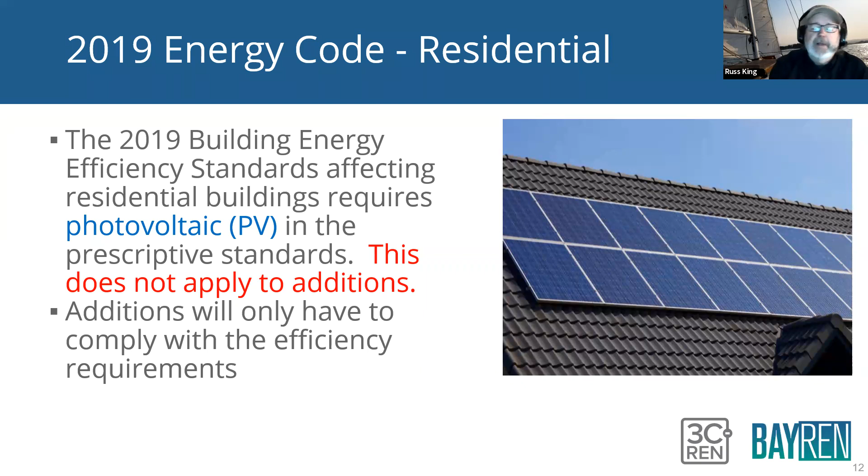When adding onto a house, there are several different ways to approach the heating and cooling, the HVAC system. So you have an existing house that has a heating and cooling system, then you're going to add on to your house and make it bigger. How are you going to heat and cool that new part of the house? There are 3 basic ways to do that.

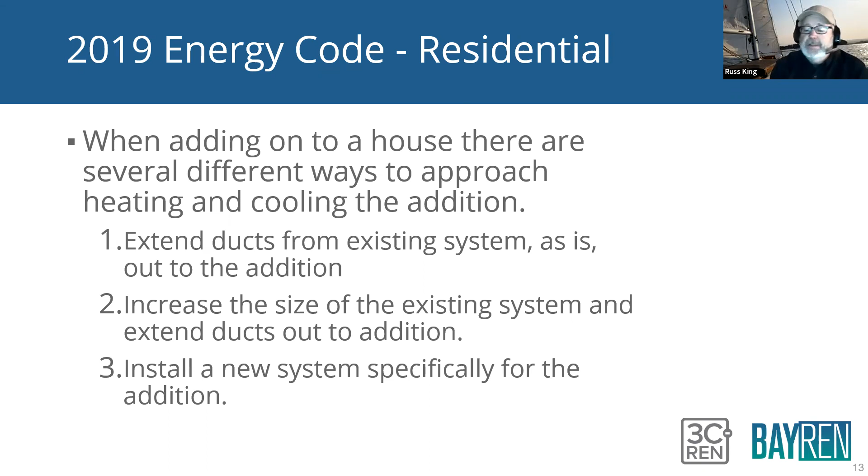The first one is to just extend the ducts from the existing system, and of course that depends on the capacity of the existing system and how much load is being added by the addition. We'll talk about increasing the size of the system and adding ducts out to the addition. And then, kind of the brute force method, is to just give the addition a whole new system itself. Again, it just depends on the size and scope of the addition.

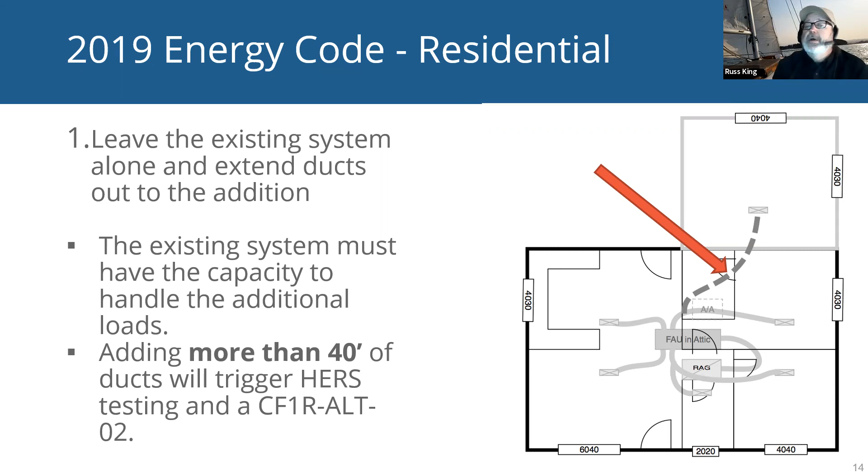So the first option: you have an existing house, you have an HVAC system serving that existing house, you build on the addition, and all you do is run a duct, or 2 or 3, out to the addition using the capacity of the existing system. The only time that would ever trigger anything like HERS testing or duct sealing is if you added more than 40 feet of duct to the duct system. That's one of the triggers for HERS testing. And if you do, you would have to fill out a CF1R Alt 02, just like you would for an HVAC changeout or something like that.

The other option is to increase the size of the existing system on the house, so you put in a bigger system, maybe a bigger furnace, bigger air conditioner, and then add a duct out to the addition. The fact that you've replaced the existing equipment will trigger HERS testing all by itself. So again, you have to fill out a CF1R Alt 02 in addition to the paperwork for making the addition comply.

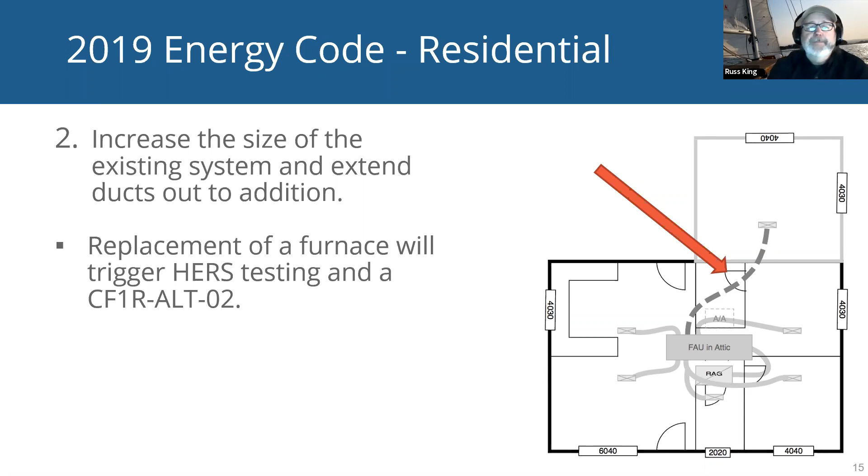That's a BayREN thing. Refrigerant charge verification is required in climate zones 2 and 8 through 15. So if any of your climate zones are in those, it would trigger the refrigerant charge verification. Climate zones 2 and 12 are the only two that would require it in the BayREN zone. Sorry about that, forgot to change that slide.

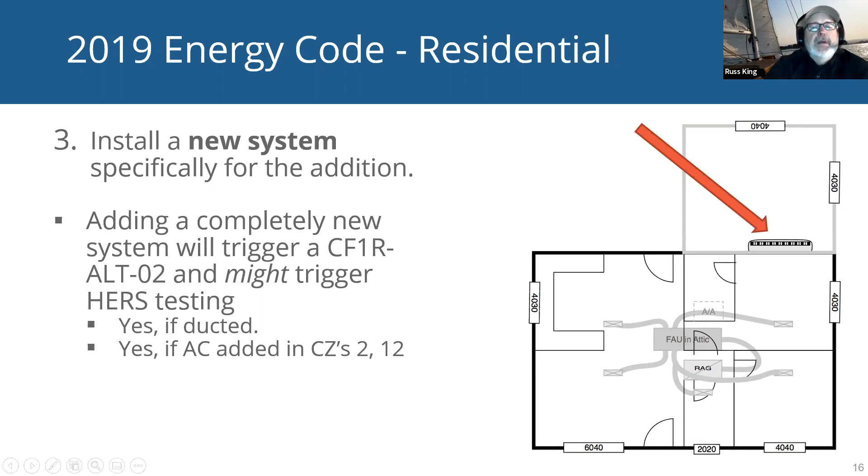For additions and alterations, the requirements for the prescriptive approach depend on whether or not the house has gas available. It gets into more specific definitions for things like water heaters. Basically, if gas is available to the house, the code historically favored gas appliances, so you had to prove you'd be more efficient adding electric appliances and replacing gas. But the 2019 code actually encourages replacing gas with electric appliances, so it's a lot easier to do than it used to be. All electric homes and additions can still comply even when there's gas to the house, thanks mostly to heat pump water heaters and space heaters because they're very efficient.

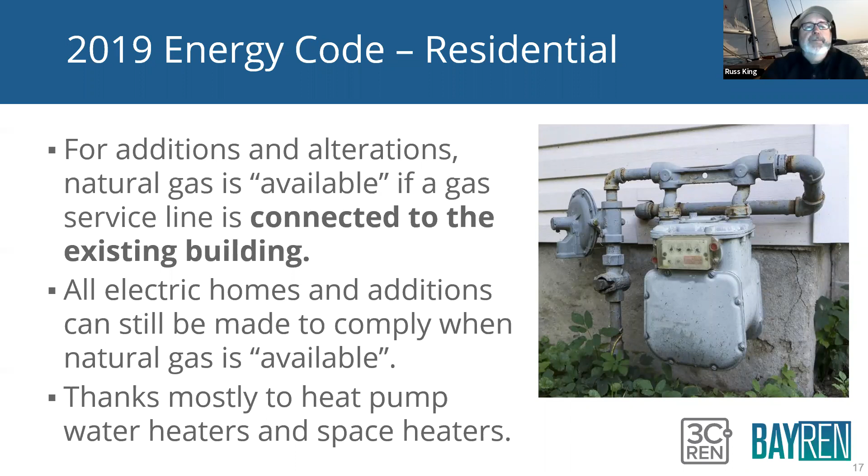Another requirement: if you install a completely new HVAC system for the addition, it triggers a bunch of mandatory measures. One is filtration—you have to have MERV 13 filtration in any new ducted space conditioning system. Also, if you have supply ventilation for indoor air quality mechanical ventilation, the type that blows air into the house, that air has to be filtered with a MERV 13 filter. This only applies to additions over 1,000 square feet.

A lot of little details going on here. You'll get a copy of these slides. You can also check the residential compliance manual, which has a really good section on additions that lists all this detail.

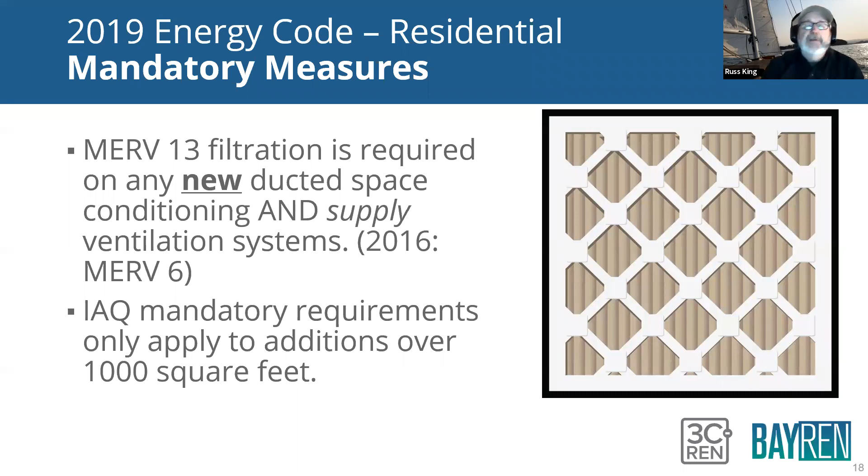Another mandatory measure that might get triggered depending on the scope of the project: all newly installed gas storage water heating systems must be readily upgradable to both tankless and heat pump. Section 150.0N talks about that. That's only if you're installing a new water heater as part of the addition—if you have an existing water heater and you're changing that, it doesn't trigger this. But if you're installing a new separate water heater for the addition, it has a whole bunch of mandatory measures, including pipe insulation.

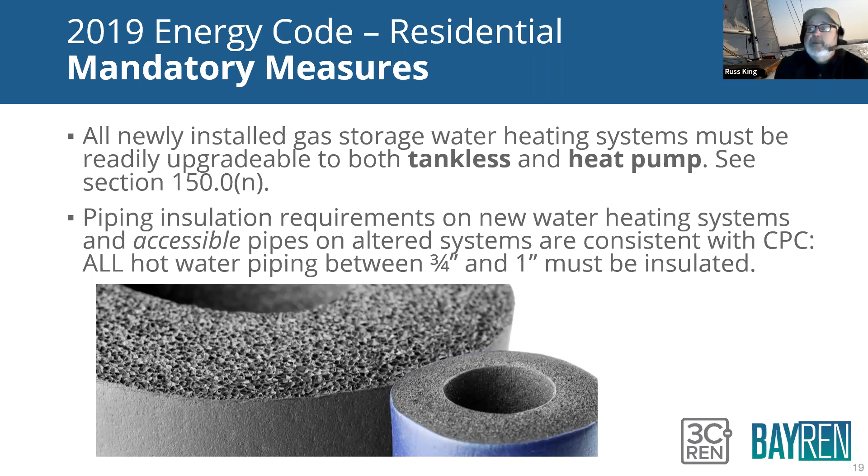Pipe insulation requirements on new water heating systems and accessible pipes on altered systems are consistent with the California Plumbing Code. All hot water piping between 3/4 inch and 1 inch must be insulated, even on an alteration. So if you have a gas water heater and you're upgrading to a heat pump water heater, that's considered an alteration, and the mandatory measures say all accessible pipes have to be insulated to these requirements.

QII, quality insulation installation, is a big one. It's a prescriptive measure on all new construction, and applies to additions over 700 square feet, but only to new opaque surfaces—new walls, new ceilings, new raised floors. If you're using the performance approach, most users can opt out of it and model it away, but in new homes that's really hard to do. In additions it just depends, it's not as hard. So you could technically model away the QII requirements on an addition over 700 square feet.

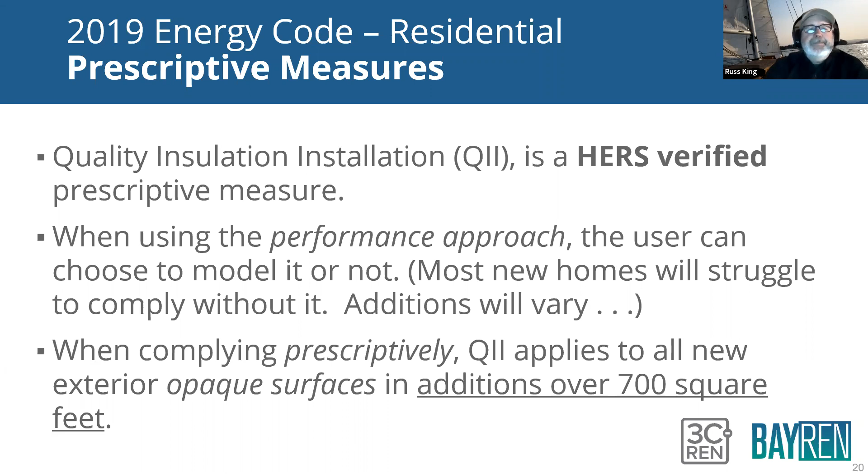Energy code documentation, documents, forms—that's what the energy code seems to be all about sometimes, filling out stuff. The energy code compliance process relies heavily on documentation, purely for enforcement. You document something so the enforcement agency can verify it was done correctly. Keeping track of all this documentation can be very challenging, but there are some very useful online tools that help you keep track of all the projects.

They're called HERS registries. We taught a class on the HERS registry, how to use it. There are 2 California HERS providers that the CEC has approved: CalCERTs, who I work for, and CHEERS. They tried to change their name to California Energy Registry, but the Energy Commission denied that request, so it's CHEERS.

So the CHEERS registry and the CalCERTs registry do essentially the same thing. They are supposed to keep track of all the documentation on any project that has at least one HERS test. I gave you some examples of things that trigger HERS testing: extending the ducts more than 40 feet, certain climate zones. If you add a refrigerant-containing component, you have to do refrigerant charge verification, duct testing, indoor air quality testing. Those all trigger HERS verification. If one HERS test is required on a project, all the forms for that project have to be in one of the two registries, either CHEERS or CalCERTs, okay?

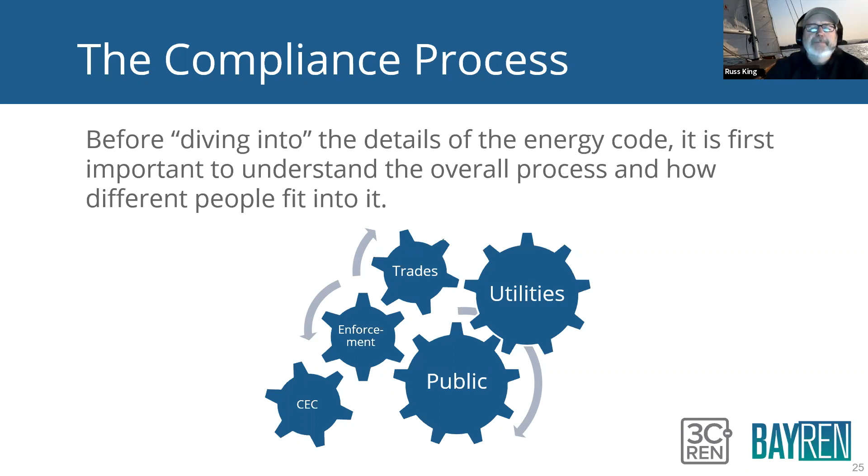All right, so let's kind of step back a second and look at the overall energy code compliance process, get a big picture view of the process. Before diving into the details of a specific part of the code, it's important to understand the overall process and where we are in that process, okay? So all projects have three basic types: there's mandatory measures that cover everything, and then there's two choices that you have on how to make a project comply.

There's the simple approach and there's the complex approach. The simple approach is simple, but it's more restrictive. The complex approach is very complicated. You have to hire a consultant, but it's very, very flexible in terms of what you can build.

Another name for those two approaches are the prescriptive path and the performance path. The prescriptive is based on just a list of features. Install what's on this list and your building or project will comply. On the performance path, you have to model the building—create a computer simulation model of the building, of the project, and show that it meets the requirements. But the nice thing is you can trade things off.

You can say, the prescriptive requirement only allows me to put a certain amount of windows in my house. The performance path will let you put as many windows as you want, but you're gonna have to do something else to the house to make it efficient to offset that.

So there's trade-offs there. This applies to new construction, additions, and even alterations if you wanted to. The prescriptive path will be used for most smaller, simpler additions. The performance path will be used for most larger, more complicated additions. There's no hard and fast rule as to which is which—it just depends on how hard it is to make it comply to the energy code.

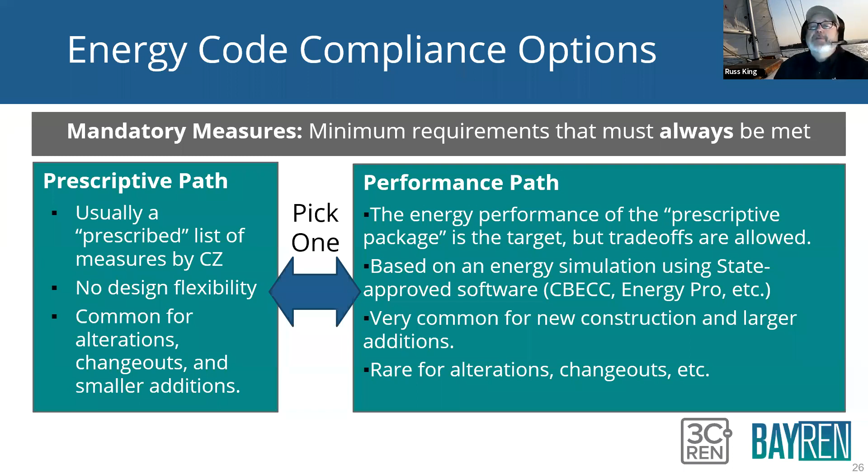The prescriptive approach is based on these tables, called table 150.1-A, and that's basically a list by climate zone. You'll notice on this table there's 16 columns—there's 16 climate zones in California. So you have to find your climate zone and go down that column, and that tells you what you're supposed to do to that house.

But if you use the performance approach, you're being compared to this list. You have to have the same energy use as if you built it to this list, but you can put in whatever features you want. That's what the computer simulation does—it compares your proposed house to the standard house that has these features in it.

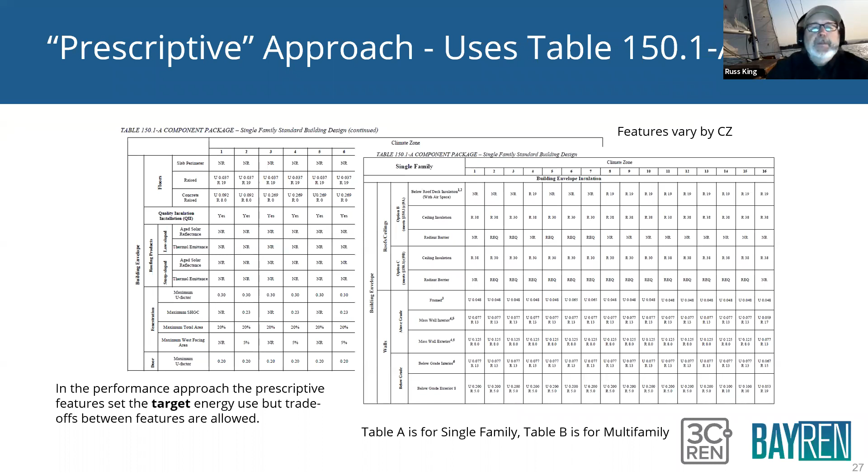I got ahead of myself a little bit. The performance approach uses the computer simulation—it takes your house the way you want to build it, models that, figures out how much energy it's going to use, and then it takes your house, applies the prescriptive measures to it, and models it. That energy use is your target.

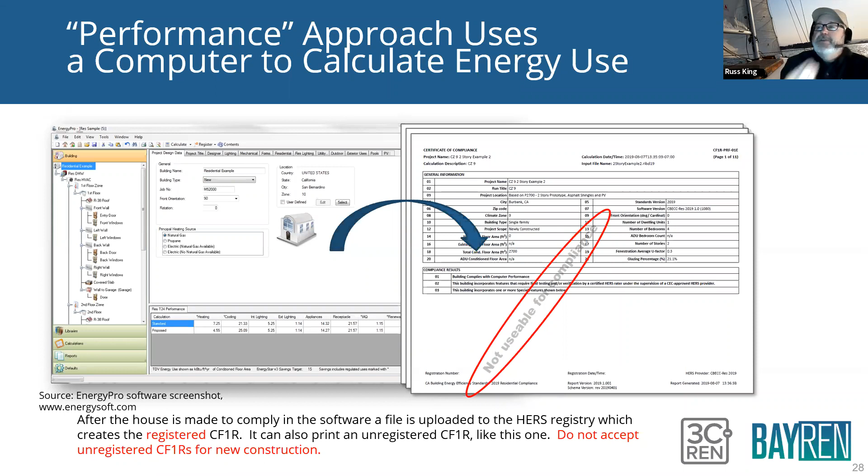So you've got your standard house, which has the prescriptive measures—that's your target. Then you have your proposed house, which is the way you want to build it—that's your actual energy use. Your actual energy use has to be better than or equal to the target.

Mandatory measures must always be met—those are not things you trade off. They're found in section 150.0, listed on most of the CF2R forms, and include things like the lowest efficiency air conditioner you can install in California, lowest efficiency furnace, and the least amount of wall insulation you can possibly have. These are bottom level minimums you can't go below.

But then there are also things like lighting in a house. You have to have certain kinds of lighting and certain kind of controls—you just always have to do that. You can't put in more insulation and trade off your lighting requirements, because lighting requirements are mandatory measures.

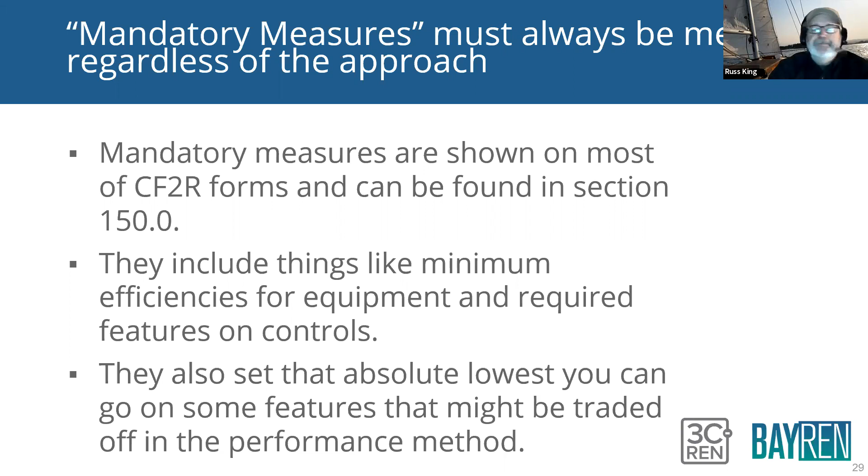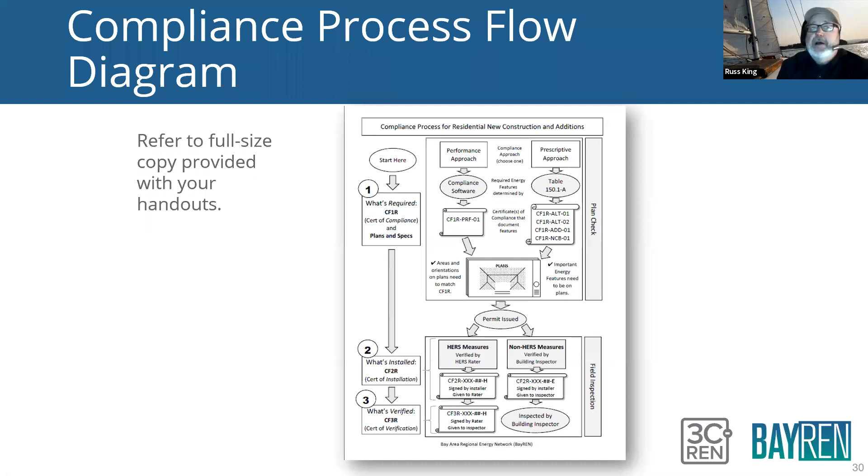So the first step is to figure out what's required. Once you figure out what's required, it goes on to a document called the CF1R. The CF1R certificate of compliance is a list of what's required for that house.

The CF1R depends on the project. It could be a CF1R PERF 01, which is the performance approach. But think of the CF1R as a list of what you're supposed to do.

Step 1 is figuring out what you're supposed to do, put it on the CF1R, and off you go. Step 2 is to install those things, then document what you installed — that's part of the CF2R. The third step is to verify what you installed, have somebody check it. So the 3 steps are: figure out what you're supposed to do, install it, and have somebody check it. If you think of the energy code in those 3 steps, it simplifies things and makes them a lot easier to understand.

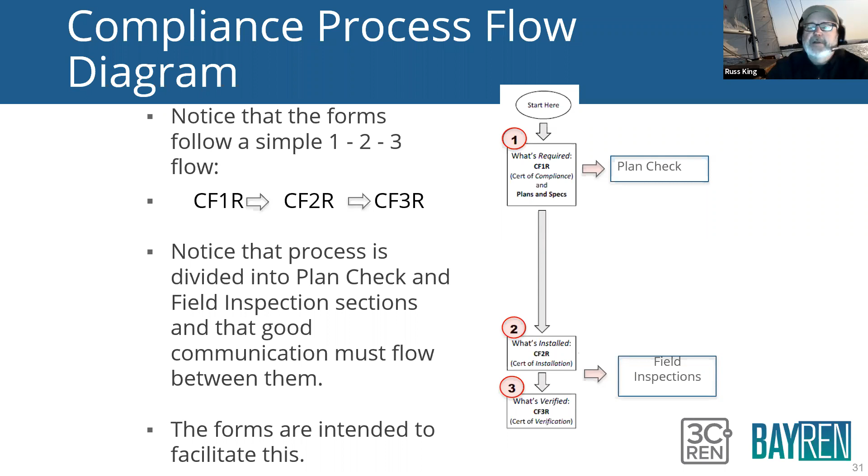Going back to the document, looking at the top part, we have step 1, the CF1R, and here are our 2 compliance approach paths. The performance approach is where you use the software. The prescriptive approach is where you use the tables. And additions can be in either one of these.

New construction, 99.99% of the time, is going to use the performance path. Alterations, like an HVAC change out or water heater replacement, 99.9% of the time are going to use the prescriptive path. But additions just kind of depend — smaller additions will probably lean towards the prescriptive approach, larger additions will definitely lean towards the performance approach, but you could have either one.

So the bottom line is you're going to have a CF1R that tells you what you're supposed to do. If you're using the performance approach, that CF1R is called a CF1R PERF, which means performance approach. If you're using the prescriptive approach, there are several different kinds of CF1Rs you might use.

There's a CF1R ALT for alterations, CF1R ALT 2 for HVAC alterations — we talked a little bit about that. CF1R ADD for additions, and then the CF1R NCB for newly constructed buildings, but that's also for additions over 1,000 square feet, which you don't see too often for the prescriptive approach. If it's an addition over 1,000 square feet, I almost guarantee they're going to use the performance approach for that.

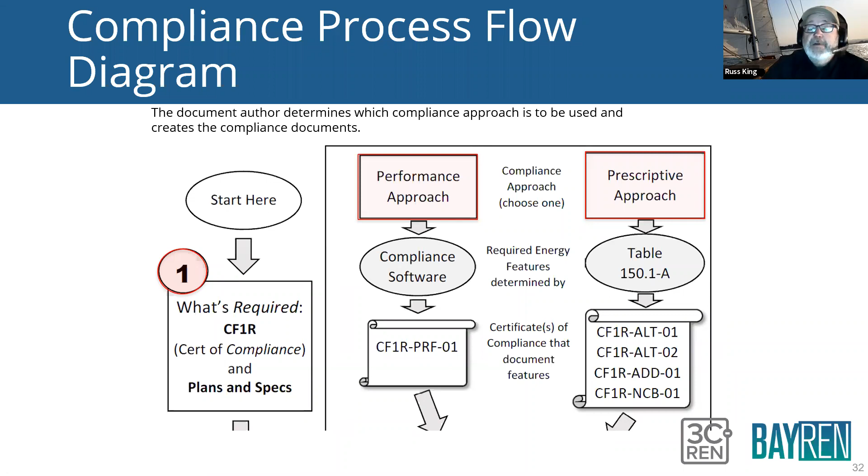Now going down a section on that diagram, we have a set of plans here, representing the plans being submitted for that project. It should have all the areas and orientations on the plans, and those need to match the CF1R. The important energy features should also be on the plans — don't leave the energy features inside the CF1R.

CF1Rs can be a little challenging to read, and they don't always get well circulated amongst all the trades. It's a good idea to take the important energy features — like the wall insulation, the kind of windows, the R-value of the walls, all that stuff — and put them on the plans. That's where the trades are going to look for that stuff.

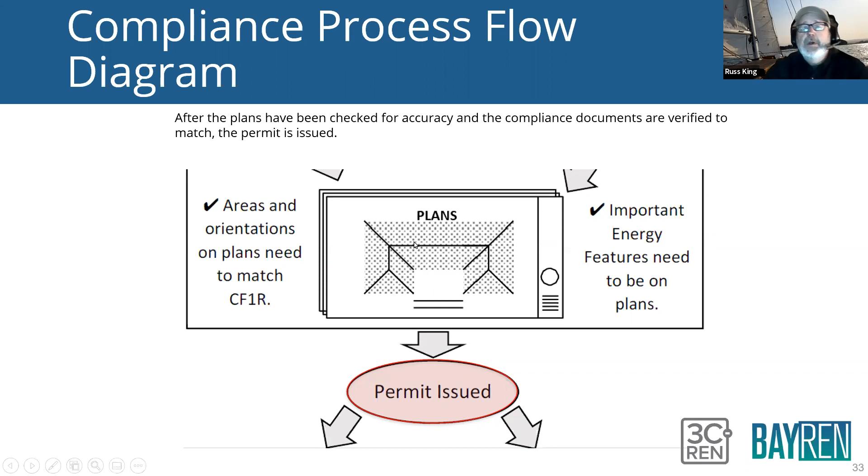Once it goes through plan check, the permit gets issued. Then once we start building the house or the project, let's take all the energy features — there could be dozens and dozens of them — and split them into two basic categories, determined by who is supposed to verify them.

We'll call them HERS measures and non-HERS measures. HERS measures are inspected by a third-party special inspector called a HERS rater. Non-HERS measures are verified by the building department. HERS measures typically require special equipment like a duct tester, a blower door, or refrigerant gauges. Non-HERS measures are typically things you can just read a label for, like windows, R-values, and water heater efficiencies.

The bottom line is, it doesn't matter which kind of measure it is or who's verifying it — they all need a CF2R, the certificate of installation. Think of the CF2R as a signed affidavit by the installer saying they put in the right stuff. That's required regardless of whether it's a HERS or non-HERS measure, so all measures get a CF2R. Then the HERS measures get one more form, called the CF3R.

That's the HERS verification certificate of verification. The CF2Rs that are non-HERS measures don't get that. They're just inspected by the building inspector, and there's no additional documentation.

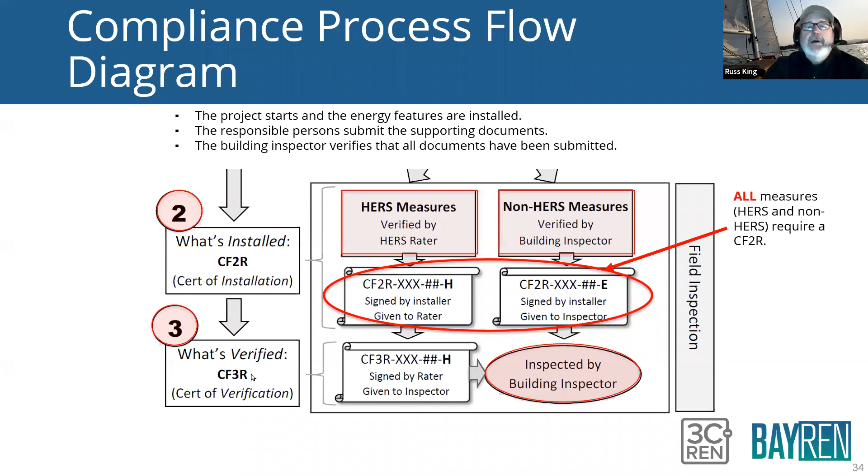All right, so there it is in a nutshell. If you have any questions on that, feel free to ask.

Let's dive into a little bit more detail about additions. Before we do that, I'm going to give you the secret decoder ring method of figuring out what the heck a form is. You get all these forms from the Energy Commission or for the Energy Code, and they hand you this form, let's say it's a CF2R EXC04, and you're like, what the heck is a CF2R EXC04? So you come in here, and this is the nomenclature for the forms.

They all follow this basic format. There's going to be CF, which means compliance form. Then there's going to be a number, CF 1, 2, or 3. The 1 is a certificate of compliance, the 2 is a certificate of installation, and the 3 is a certificate of verification. That's our 3 steps.

Figure out what's required, what's installed, what's verified. Then there'll be an R for residential, and then there's going to be 3 letters, and those 3 letters will correspond to this list here. For CF1Rs, the 3 letters sort of describe the compliance approach and a little bit about the project: is it prescriptive addition, a prescriptive alteration, or a performance approach? So that's what those 3 letters will be.

On the 2Rs and 3Rs, those 3 letters describe a part of the building, a building component. So they're going to say things like ENV for envelope, EXC for existing condition, MCH for mechanical, LTG for lighting, and so on. It's like a code for the building component.

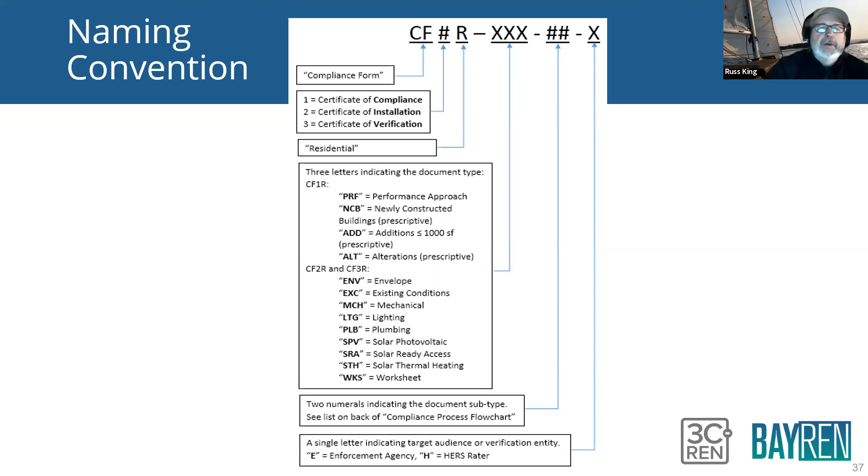The good news now, since the 2013 code, is that they are all electronic. You can actually do the entire energy code compliance process without printing out a single piece of paper if you wanted to. A lot of people rely on paper—that's fine, if it helps your inspection process or whatever, that's fine, but you don't have to. You can do it without printing out any paper for all the forms.

All right, for prescriptive projects that don't require any HERS measures - so that would be like replacing a water heater or replacing windows. It's possible you could have a really small addition that did not trigger any HERS verification. If that's the case, they don't have to be registered with the HERS provider.

Good news and bad news. The good news is they don't have to register with the HERS provider. The bad news is it's harder to track because they're independent forms, and there's no central location where you can go find them.

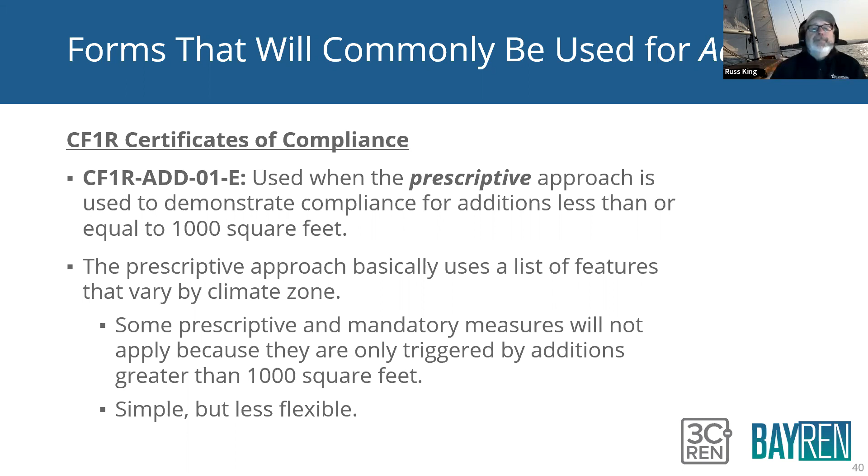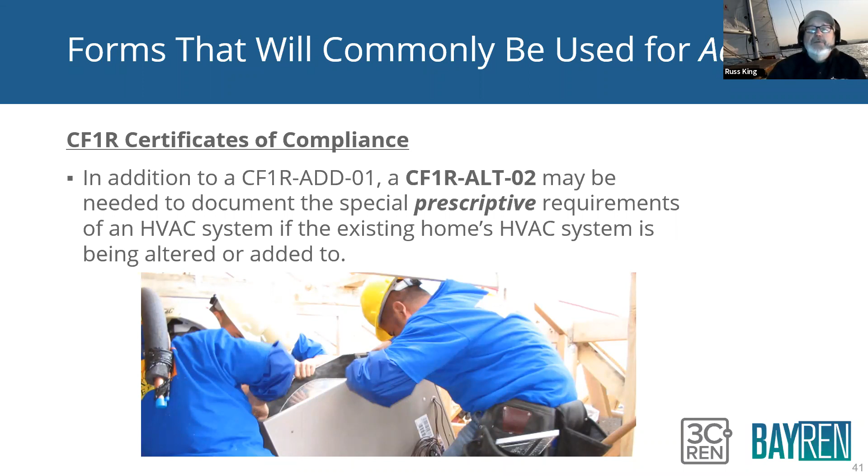If you're altering the HVAC system as part of the addition - and I showed you those three options at the beginning - those probably will trigger the CF1R Alt 2. So as part of the addition, you're altering the existing HVAC system, which will trigger things like duct sealing, refrigerant charge. If it's a completely new system, you might have airflow and fan watt draw - all these HERS measures. So that will be the CF1R Alt 2 to cover those HVAC alterations.

The CF1R NCB - that's the one I was talking about. If the addition is over 1,000 square feet, it triggers some extra requirements such as indoor air quality. So the CF1R for prescriptive additions over 1,000 square feet is the CF1R NCB. NCB actually stands for newly constructed building, but additions over 1,000 square feet use that form as well.

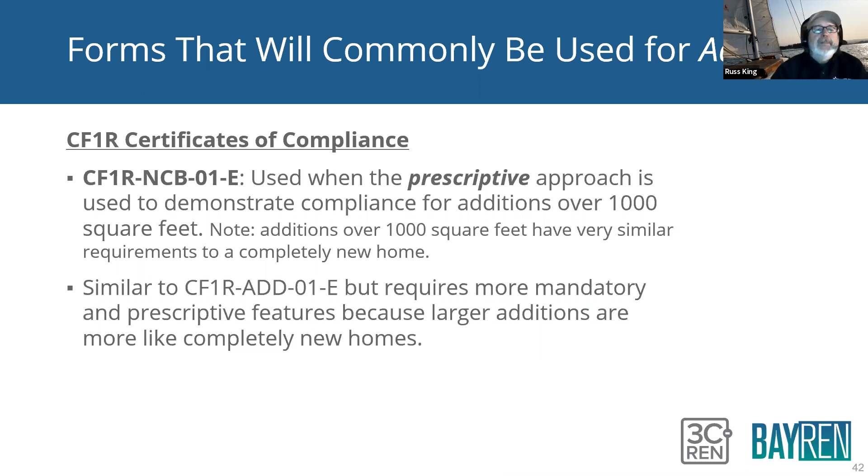Then, probably I would say, if I had to guess, I'd say 75% of additions use the performance approach, at least from what I've seen. It depends again on the size and complexity and all that stuff, but a lot of additions really do use the performance approach.

And when they use the performance approach, the CF1R will look very similar to what it would look like for a new house. It's called a CF1R Perf 01-E. And for additions, you have a choice of how you want to model that house or addition.

One of the more common ways is what we call E+A+A. That is where the CF1R is going to show the floor area and the walls for the entire house - the existing house and the addition together. E+A+A stands for existing plus addition plus alteration. The interesting thing about that is you might be adding on this big addition to the house that has a lot of glass in it, and it would be very hard to make that addition comply by itself.

So what E+A+A does is you're sort of buying energy compliance by improving the existing house. You can actually make your addition comply by adding insulation to the existing house, by replacing the windows in the existing house. So it's an interesting concept, and we call that E+A+A.

Right on the CF1R at the very beginning, it'll tell you, I want to say it's like row 5 or 6, the very first page of the CF1R, whether it's an alteration by itself, whether it's an existing plus alteration, or sometimes you can even model additions as a brand new house. You can say, I'm going to meet the requirements as though this addition was a brand new house.

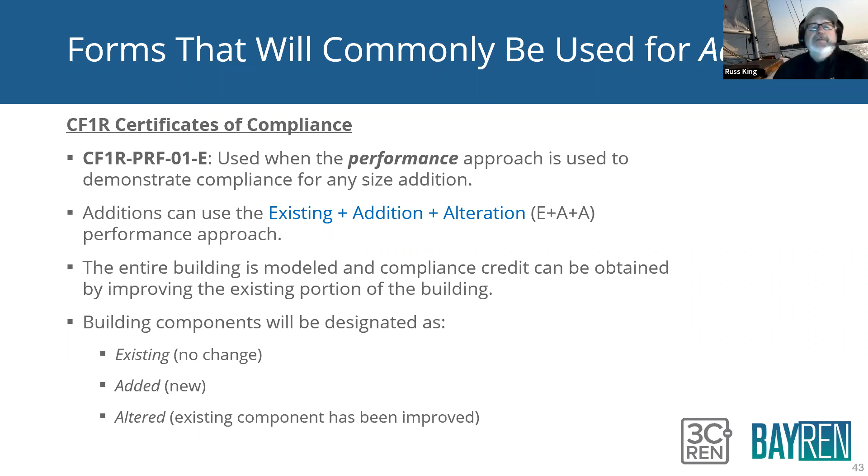CF2Rs, again, think of it as an affidavit for the installing contractor saying that they installed the right stuff, okay? So it applies to basically any features that are installed or required as part of that addition. And again, that depends on the size and the complexity of the addition. But you're almost always going to have windows, right? And in an addition, you're almost always going to have windows.

So there'll be a CF2R ENV01, that's going to document that they put in the correct windows. You're going to have to seal any new walls and stuff like that, so that's going to be the ENV02, which is going to have air sealing. You're probably going to have some new walls or ceiling with insulation in it, so that's the CF2R ENV03.

Again, all these forms are tracked for you by the HERS registry. The CF1R is uploaded to the HERS registry, and the HERS registry takes that CF1R and figures out all the forms that are going to be needed for that project and creates that list. That's the project status report, a list of all those forms.

So the LTG is lighting. All projects pretty much need lighting, right? Any kind of addition is going to have some sort of light fixtures in it, and you have to document that they met the mandatory measures. So that's the LTG01. And then, of course, mechanical. If you're altering the mechanical system or adding a new mechanical system, the MEC01 is where it's going to talk about what's going on there.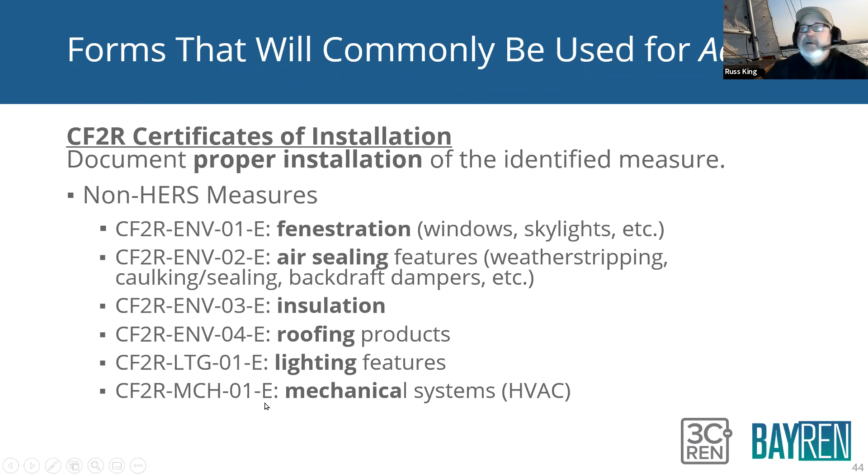By the way, that list there, those are all non-HERS measures. Those are all measures that are documented by the building inspector. The next list are HERS measures. Let me go back again one time real quick. Notice all these CF2Rs here - notice they all end in an E. That's how you know those are non-HERS measures.

This next list, these all end in an H, and the H stands for HERS verified. That means they also need a CF3R. These CF2Rs are going to have a CF3R that sort of goes with them.

So those are things like the MCH-20, for sealed ducts. If you're adding or replacing equipment that's a ducted system, or if you're adding or replacing more than 40 feet of ducts, that triggers duct sealing. That has to be tested by a HERS rater. If you're installing a completely new ducted system, you have to test the fan watt draw, you have to test the airflow, and if it has air conditioning, depending on the climate zone, you might have to test refrigerant charge.

The MCH 27 documents indoor air quality mechanical ventilation. That's only triggered for additions over 1,000 square feet.

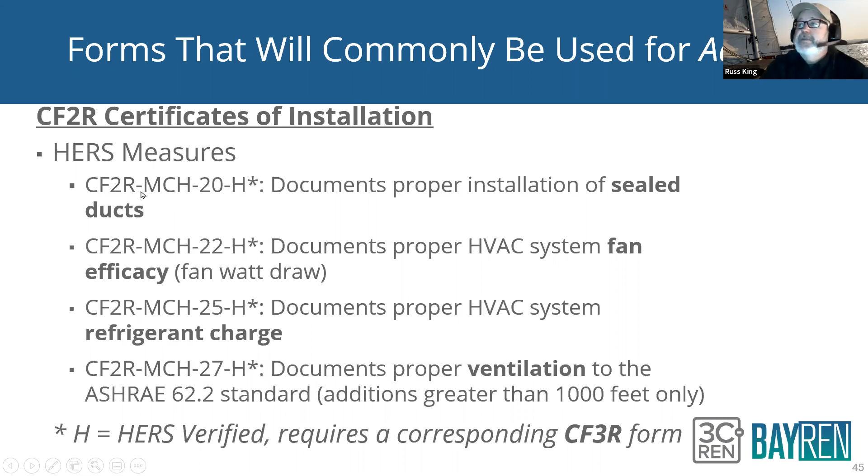Then the CF3Rs. So let me go back. You've got the MCH 20, MCH 22, MCH 25, and MCH 27. Those are all CF2Rs, filled out by the installing contractor, but they end in an H, so those are HERS verified measures. The next list is the CF3Rs that go with those: CF3R MCH 20, CF3R MCH 22, MCH 23, MCH 25, MCH 27. Same numbers, the only difference is they have a 3, CF3R instead of CF2R.

These are filled out by the HERS rater. This is where the HERS rater goes out, tests the ducts, and says yes, they pass. They test the airflow of the HVAC system and confirm the ducts are sized correctly. The CF2R is for the installer to say, yes, I did it correctly. The CF3R is for the rater to say, yes, I checked it and they did it correctly.

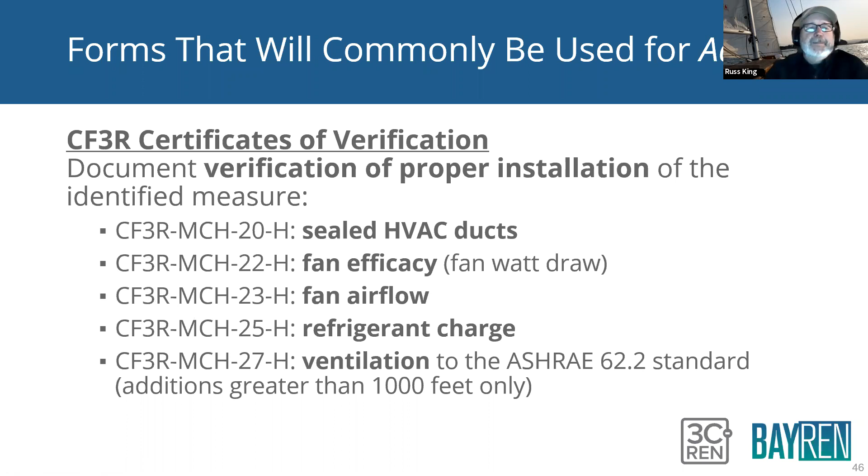All of the forms, the CF2Rs and CF3Rs, are put into the registry specific to that project, so the list you see is only for that project. Look at another project and it'll have a different list, depending on what the CF1R was. That's a great place to go—look for all green dots, and don't final a project until it has all green dots. If you're waiting to final a project and there are red dots, both HERS providers' registries have a button where you click it and can send an email to the responsible party so they can take care of those red dots.

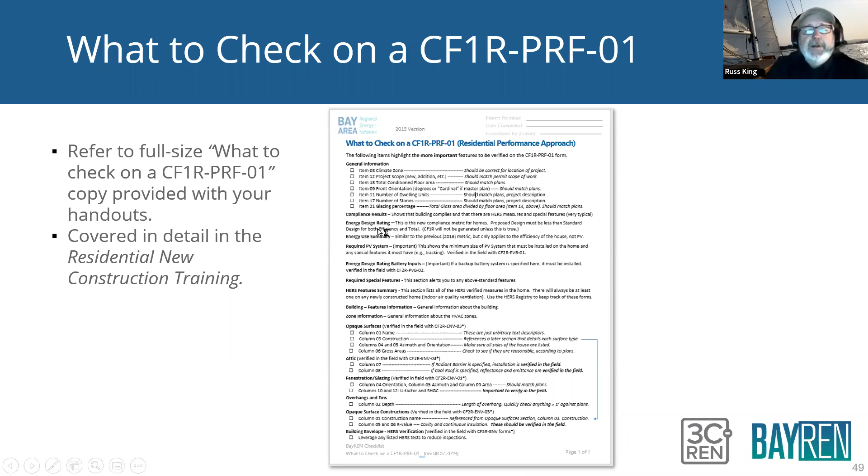The CF1R, the CF1R Perf 01, can be a pretty complicated document, so we put together this thing for BayREN—a checklist for what to check on a CF1R Perf 01. It allows you to go down through the document and tells you what things to check for, what's really important, because there's a lot of stuff on a CF1R that's just not super important and you can kind of not worry about it. This really focuses on the important stuff. That's available to you.

Now this topic is kind of a hot one—ADUs. I'm sure all you building department folks are pulling your hair out regarding ADUs these days. The big question with an ADU is whether it's an addition or new construction. We got these slides from the Energy Commission—you'll see their logo here; these were put together by the Energy Commission, and you may have seen presentations from Javier or Chris Olvera and others. But I borrowed their slides, and these talk specifically about ADUs. So the question is whether it's new construction or an addition, and that determines the features needed. If it's new construction, it'll probably need solar panels; if it's an addition, it won't.

A newly constructed building is one that has never been used or occupied for any purpose. An addition is a change to a building that increases the conditioned floor area and volume—that's very important, conditioned floor area and volume. So if you have an unconditioned garage and turn it into conditioned space, you've added conditioned floor area and volume—that's an addition. If you add a whole wing to your house, that creates newly conditioned floor area and volume, so that's clearly an addition too. Even if you're not adding any walls, if you're taking part of the house that's unconditioned and turning it into conditioned space, that's an addition—any space being converted from unconditioned to directly conditioned counts. An alteration, on the other hand, is any change to an existing building that triggers the energy code but doesn't fall into one of those other categories—like adding windows or replacing a furnace. Those are changes to the building, but they're not adding conditioned space, so we call those alterations.

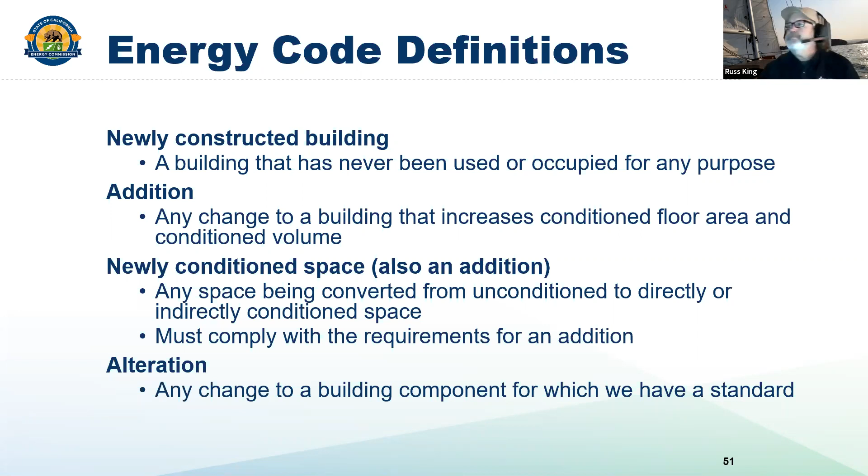So now we have to figure out whether an ADU is new construction or an addition. We have to determine whether it's attached or detached. If it's attached, it's never considered a newly constructed building. If you're building an ADU and it's up against an existing building, with either a common wall or a common roof or ceiling, it's considered attached, and that's never newly constructed. So that's easy, that will always be an addition.

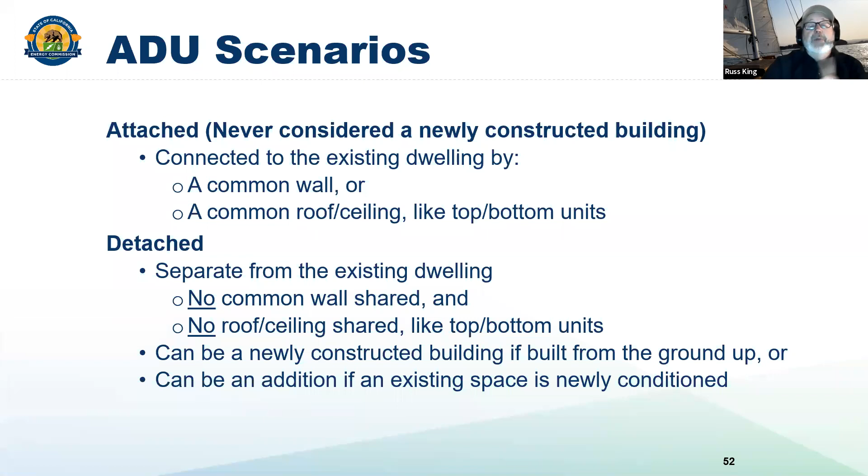If it's detached, there's a couple other things you have to check for. If it's separate from the existing dwelling, with no common walls, no shared roof or ceiling, it can be a newly constructed building if it's built from the ground up, freestanding and all new. That would be new construction. It can be an addition if it's freestanding but attached to a garage or some other building, like a pool house, rather than the main house. That's still considered detached because it's not attached to the main house, but it depends on whether it's attached to another building.

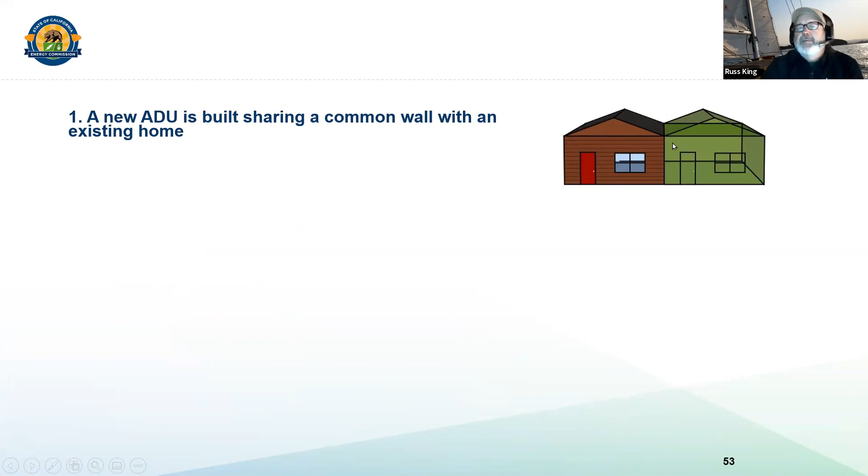So a new ADU is built sharing a common wall with an existing home. This is the existing house, and they build something next to it that's attached, sharing a common wall. That makes this an addition. That's pretty simple and straightforward.

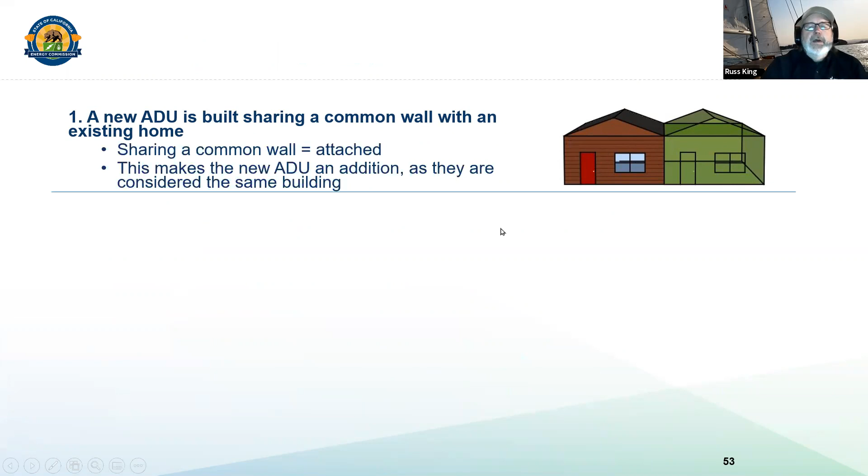Then you've got a garage attached to an existing house, and you convert that garage into an ADU. It increases conditioned floor area, so that's an addition. The ADU is an addition because you're creating conditioned floor area and it's attached to the house. So both of these are considered additions, and the ADU will comply as though it's an addition.

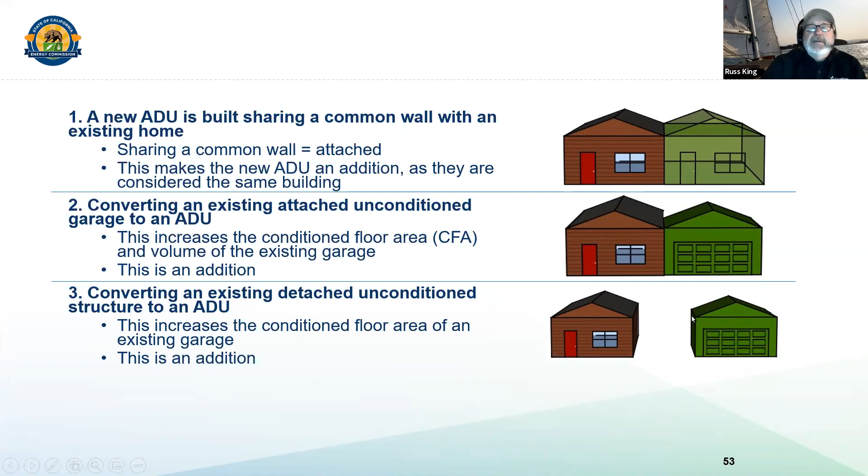If you've got a detached garage that's not attached to the house, but it's an existing structure, and you convert that into an ADU, you are increasing conditioned floor area and volume. That's also an addition because you're using an existing structure as part of the ADU. If you're building an addition on top of an existing detached garage, that's also an addition because you're sharing a common roof or ceiling with an existing structure.

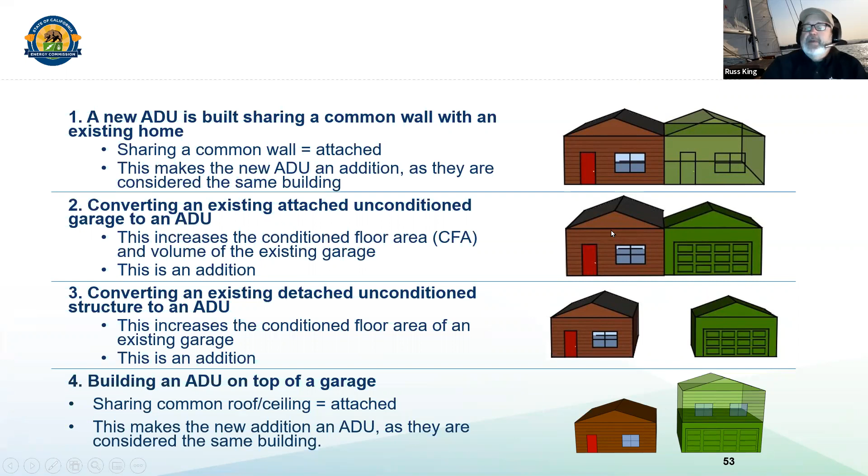So these are all examples of ADUs that would be considered additions, and they would be modeled, with compliance treating them as though they're additions.

Now let's look at some different ones. You've got an existing house, and you build a brand new structure all by itself, freestanding, nothing touching it. That would be newly constructed.

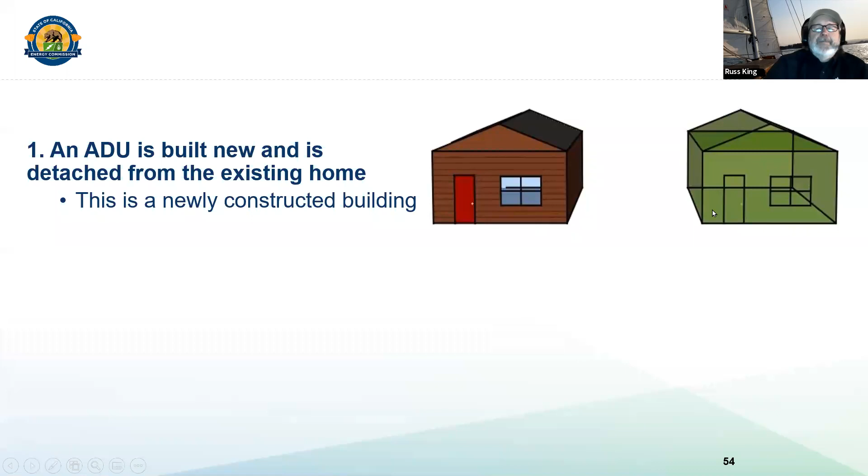What if there's a breezeway? This one came up the other day. A breezeway is not considered sharing common walls, floors, or ceilings. So that would also be a newly constructed building.

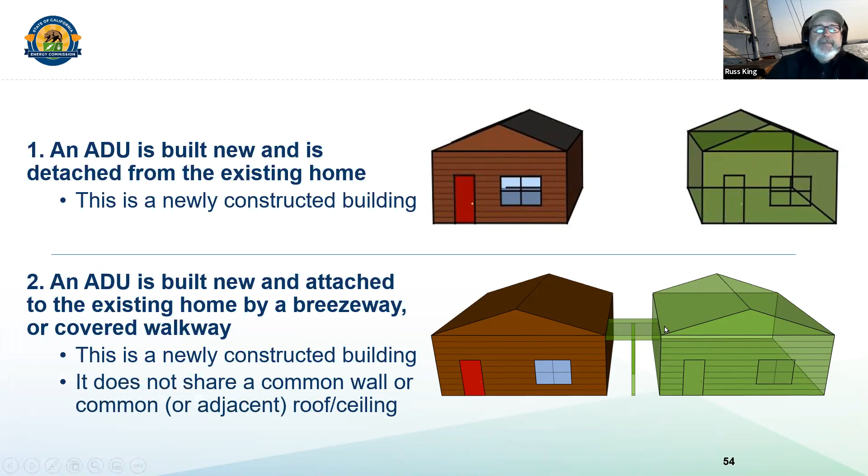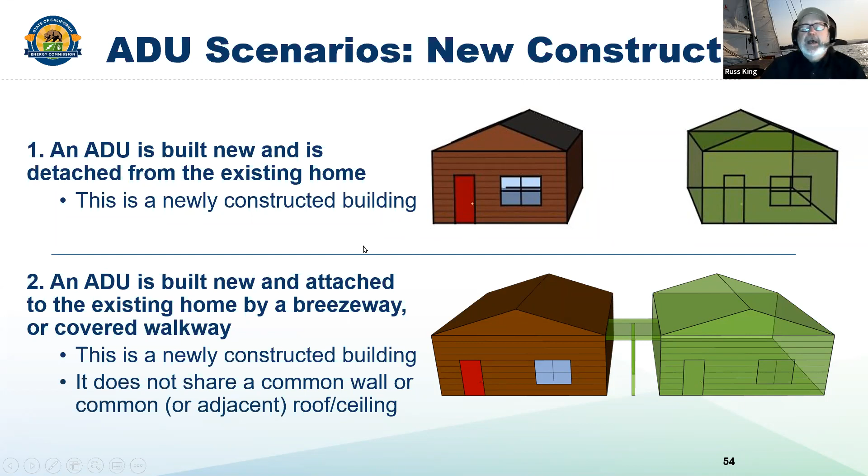So there are some permutations to this. If you're really, really not sure, the best thing to do is call the Energy Commission hotline. They've probably answered this same question 20 times a day, so they've got it figured out. If there's some permutation like a walkway or something like that and you're just not sure, call the hotline.

Converting an existing conditioned space, like a conditioned basement, to an ADU. Let's say it's a big house and they want to take one of the bedrooms and bathrooms, separate and isolate it from the rest of the house, and turn that into its own dwelling unit. Since it's already conditioned, you're not adding conditioned space or volume, and it's certainly not new construction. That's actually considered an alteration.

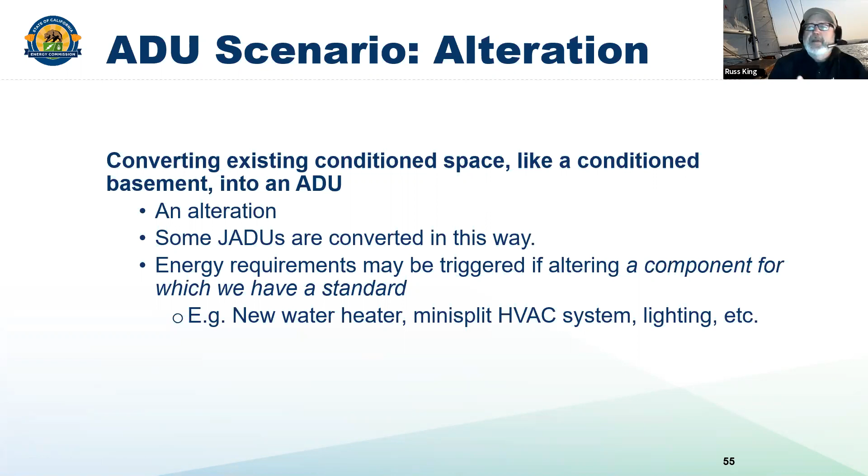If you touch the HVAC system, you might need some HERS testing, but that's considered an alteration, and it's a lot easier to make those comply. You're not really increasing energy use, you're just separating part of the house from another part. So in summary: new construction means a detached new building, or a detached new building that is attached by a breezeway.

Those are treated as new construction. The big difference between new construction and additions is these are probably going to need PVs. And the reason I say probably is because there are some exceptions to PVs. If it's shaded by another structure or a bunch of trees and stuff like that, there are some exceptions, but mostly it will require PVs and they'll have to prove the exception. Additions do not need photovoltaics, PV panels.

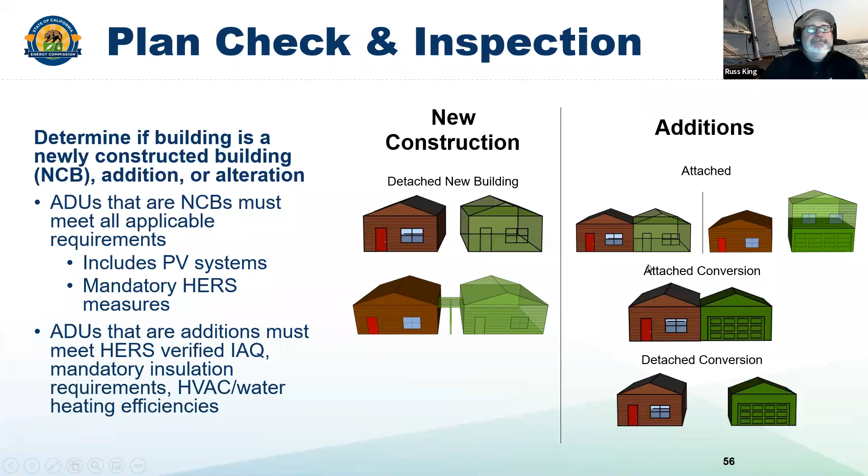All right, to wrap this up, we're going to talk about some best practices for energy code enforcement, just kind of a summary.

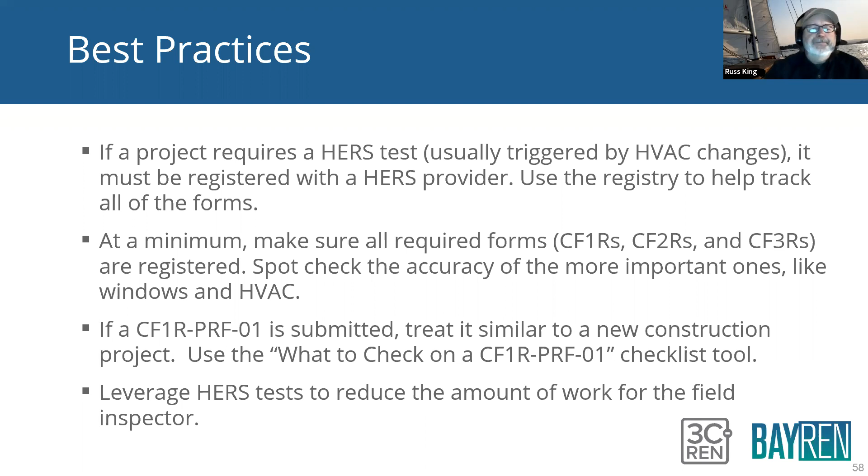I will say it's not as good as face-to-face training, because I do a lot of face-to-face training. I definitely prefer face-to-face training, but the flexibility, the ability to, I literally had some people from Florida sit in on a class that I did for BayREN the other day, because it was about HVAC design. So BayREN trainings, Energy Code ACE also has a bunch of trainings. Their training usually goes into a lot of detail. They are very in-depth training at Energy Code ACE.